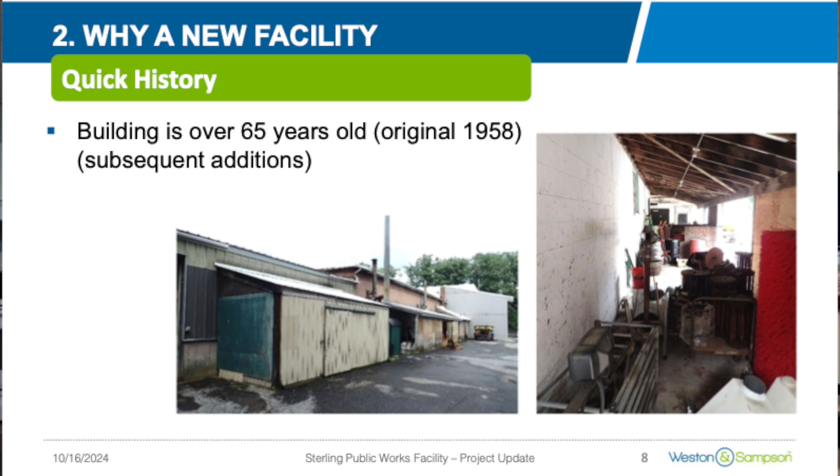So also in reference to the population, when this facility was built in 1958, around that time, the population grew pretty rapidly, and it's more than doubled since then. And with the higher population comes more road miles to maintain, more responsibilities in general, larger fleet items quantity-wise, and the size of the trucks themselves.

So all of those increases, and they've made some additions, but they're working out of a facility that's undersized. This negatively impacts their response time, general efficiencies, employee safety, and health concerns with the migrating fumes and the vehicles that are parked outside that hinders their lifespan.

So I touched on just some of those aspects. Essentially, the facility does not meet codes of today. The building code does not. It is not compliant with building code, the accessibility codes, OSHA. Those operational efficiencies are hindered for today and for future growth opportunities.

There's inefficiencies with energy. Again, it's unsafe and unhealthy for the staff that works out of this facility, and there are structural deficiencies. Here are a couple examples. So some of the foundation is cracking. There's CMU breaks, like a step crack above some of the penetrations. There's water damage. I believe there's some examples of some leaks throughout the facility.

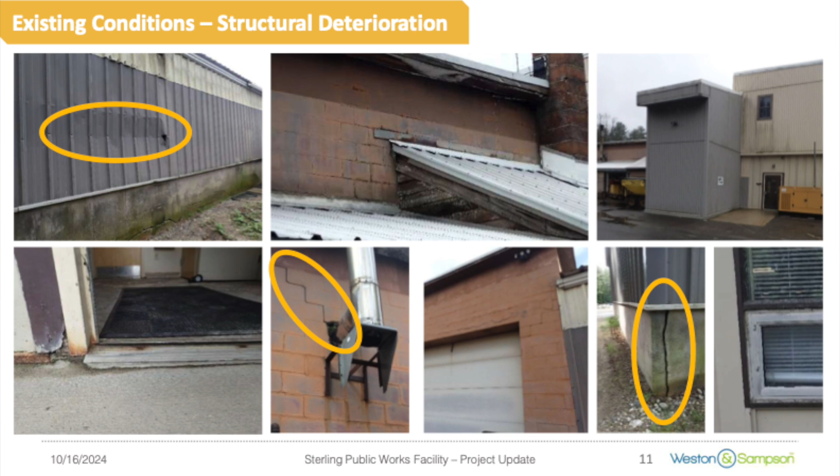These next few slides show a side-by-side comparison of what they're working with today and what a more standard modern facility could provide. So office space is cluttered. There's not really adequate daylighting. In a newer facility, you would get the adequate furniture systems and proper daylighting.

Same deal, this room we're in right now is the break room, but it's also doubling as these conference spaces. In a new facility, you could separate those, so you could have a conference meeting while the staff is using a separate break room. In terms of IT and data, this is pretty, the photos speak for themselves, I think. They're doing the best they can, but it is pretty clustered and a bit archaic compared to a new setup with a data rack.

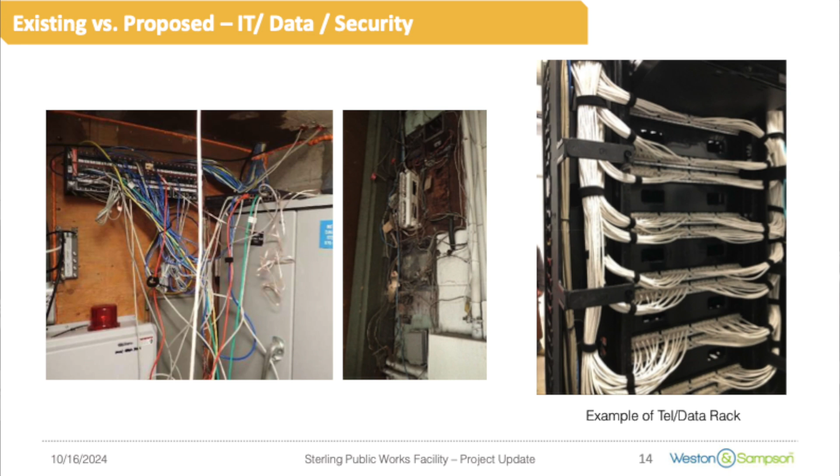In terms of the SCADA, this is a risk, a security risk, and as a first responder, that could be a problem if things went down.

Fleet maintenance. On the left, we can see low ceilings, pretty narrow bays, so that limits the mechanics from moving around the equipment they're maintaining with ease. There's clogged floor drains that are no longer working compared to a modern facility, which would have a dedicated fluid storage room with containment curbs.

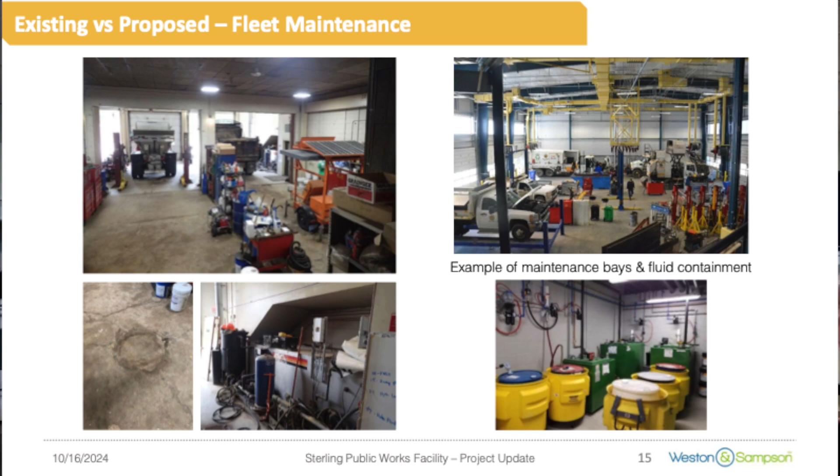So if there's spills, it's contained. It's not at risk of leaking outside the building. There are high overhead doors. The structure and all the utilities are high above, so there's no risk of when you raise a truck potentially hitting the structure or clipping into the fire protection system.

Fleet storage, again, a lot of these trucks and plows and equipment are being stored outside in storage containers, but also just outside exposed to the weather, which you can see some areas of rust. The vehicles, they can get inside, they're very tightly packed here. There's really no clearance for staff to walk around the truck safely.

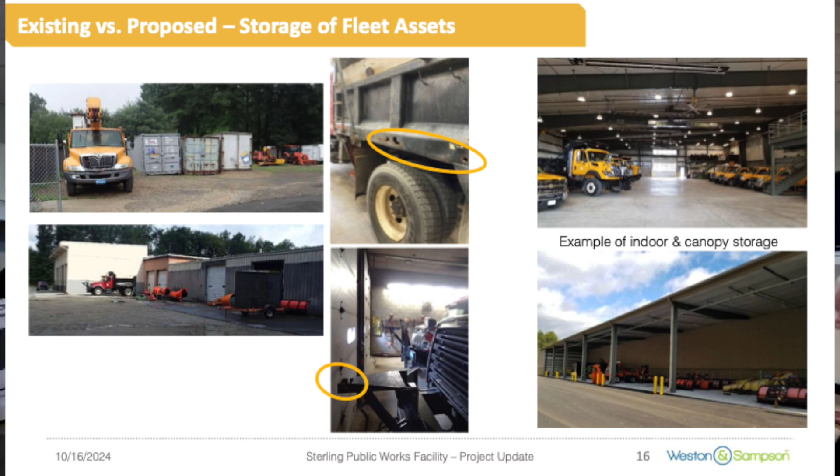Compared to a center drive aisle storage arrangement where you could have your angled stacked parking for quick in and out as a first responder, you can really cut down on unproductive labor. If things are stored outside, the staff first has to clear it off, start up engines. That will take much longer than if it's in a minimally conditioned garage.

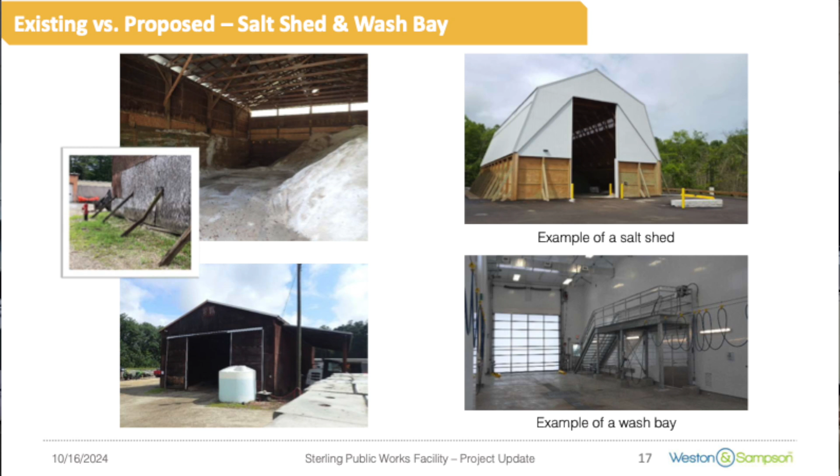In terms of salt shed and wash bay, the salt shed currently has serious concern of potentially failing structurally. There's been some efforts to reinforce the walls, but even those braces are cracking. There is no wash bay currently. In a modern facility, typically the Public Works includes essentially a car wash to knock off any of the salt buildup that can corrode the vehicle faster. So it helps to really maintain the trucks and get the full lifespan out of these very expensive equipment pieces.

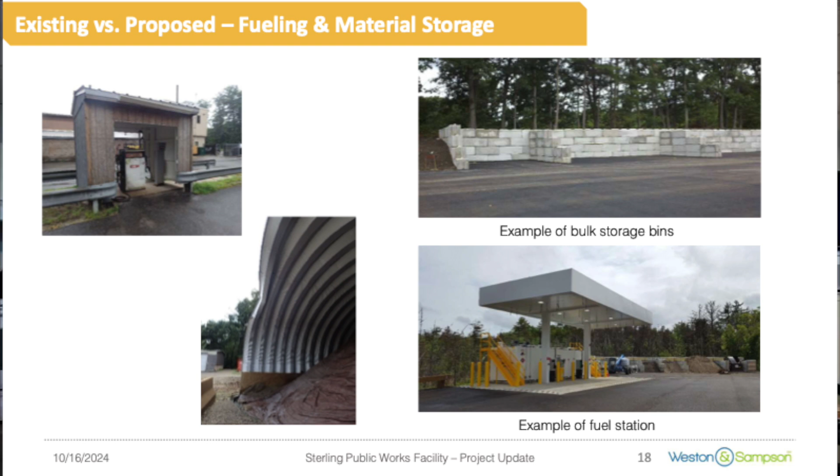And then fueling, the image on the right shows what a modern fuel station would look like with above ground tanks and some bulk storage bins, using blocks to keep the material within the block and not spill out onto the site, so you can really maximize your supply.

So expanding on these opportunities and benefits with a new facility. Number one, safe and healthy. We design fume mitigation walls so the exhaust won't migrate into the administrative spaces. There's an increased lifespan that comes with storing vehicles inside, which reduces maintenance and replacement needs. The building would comply with codes and regulations and overall improve operational efficiencies in response time.

There could be large exterior spaces throughout the site for other town use. Different departments, other agencies in town could potentially use some of the exterior space to store their overflow material. In terms of employee morale, it could help attract staff, retain staff, and all in all, meet the demands of today, but also for the next 75 years.

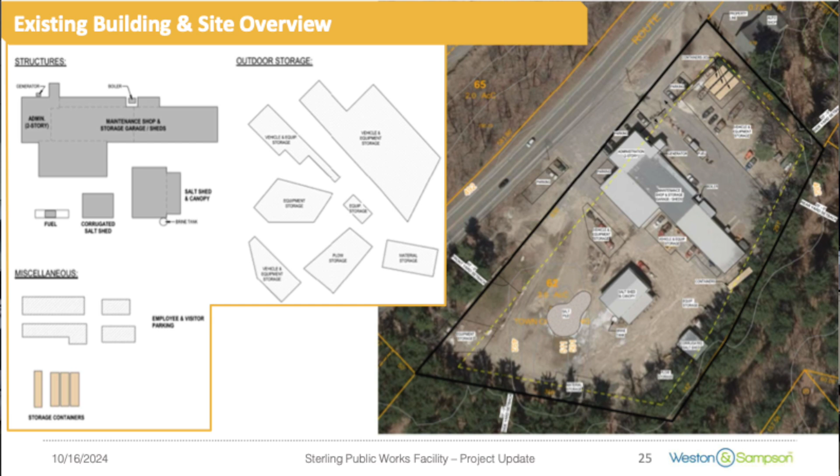Here's a quick overview of this site. Currently, the building itself is about 16,000 square feet. But there's a bunch of areas throughout the site storing overflow equipment outside, so that needs to be taken into consideration when comparing our proposed program of about 36,800 square feet. Again, this building is 16,000, but keep in mind that's 24,000 square feet of storage areas without coverage. So I think the numbers are justified.

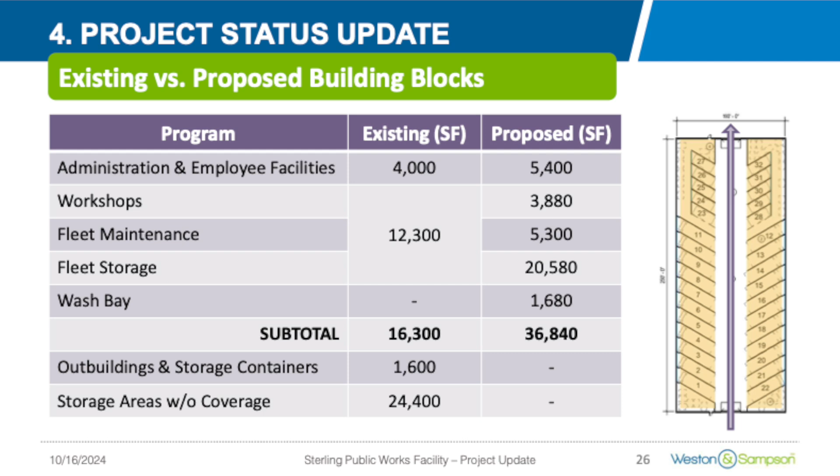The largest space of that is the fleet storage garage. Luckily, that's the cheapest per square foot to construct, and it's critical for quick response, keeping the center drive aisle free and having two stacked rows of vehicles at an angle. Other than that, we have our admin and employee facilities, the workshops, fleet maintenance, and a wash bay. So taking those building blocks...

We did a few conceptual site layouts using this site. There were a few good options here, but it really is maxing out the size of the parcel. It's pretty small to begin with, and when you consider setbacks, we are getting very tight against the property line.

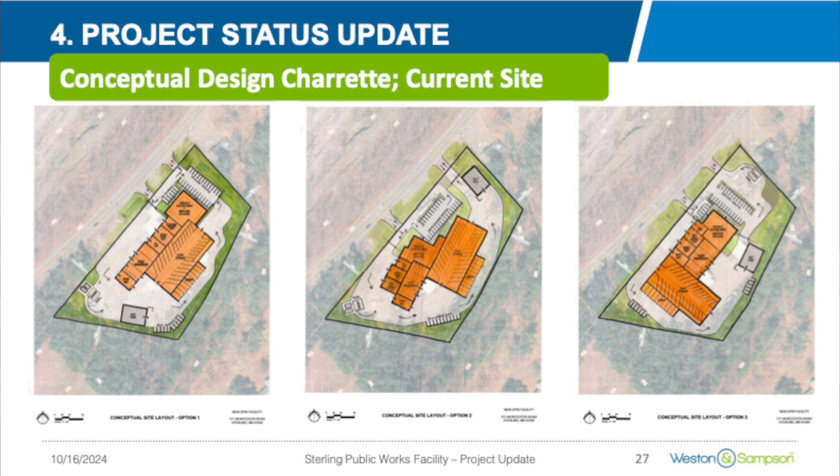So during that process, another site came up, the landfill site, or the sand pit behind the landfill site. We looked at a few site plan concepts there using those same building blocks, but I'd like to call out that this incorporates a drop-off loop for residential yard waste, which adds another community amenity.

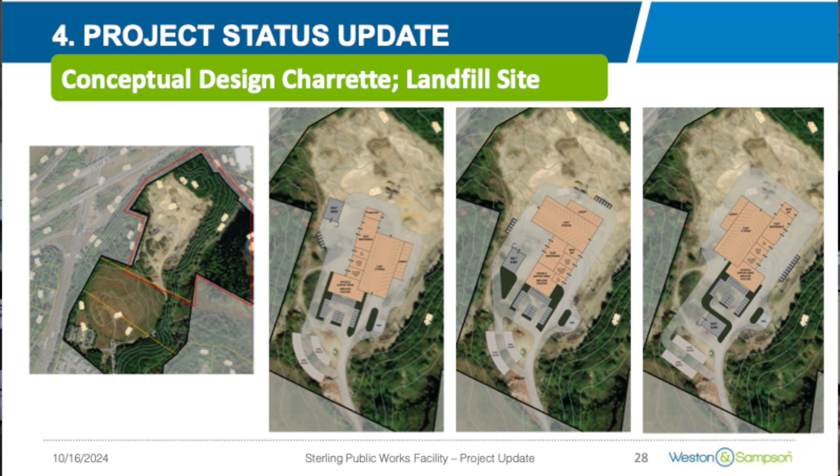Thank you, Della. Sorry, I've been sitting all day, so I'm going to take this opportunity to stand.

So Della talked about the program and the size that we came up with. This is a once in a career, once in a lifetime opportunity for the town to develop a public works facility, and that number that was just given, what was it, 36,000 square feet

is hard to understand for your residents, and probably you in this room and a lot of other people. So what we try to do is give you a comparison. Other communities, what have they done?

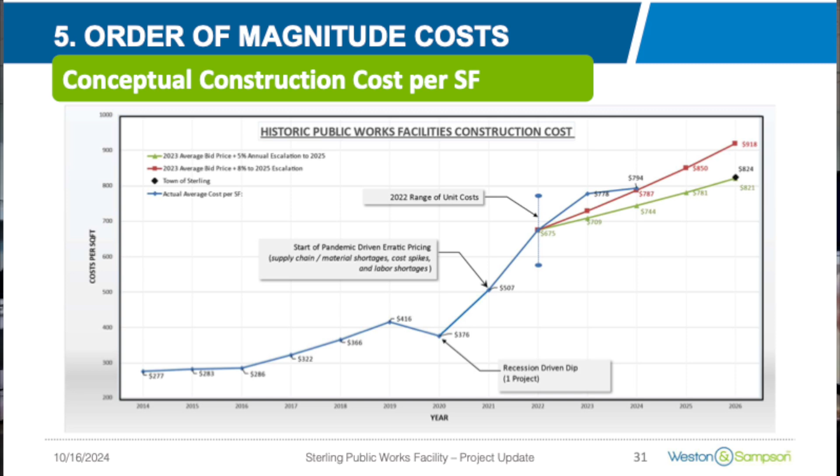Contractors were flush with work. There were labor shortages, material shortages, everything driving up the price for a lot of people. Pre-engineered metal buildings at that time had a lead time of about 16 months, and companies weren't guaranteeing their pricing until like 3 weeks prior to delivery. How does a contractor hold his price on something like that? That uncertainty drives up the price.

Fortunately, we're out of that situation now, but the trend continued for a couple of years. You can see in 2022 that range of pricing we've got, and that's a pretty big range. That vertical line represents the highest bid and the lowest bid we received, all in cost per square foot.

2024, we have some good information, but it's still kind of erratic. We're opening another bid in about a month, so hopefully that will get us some good data. Because we don't feel very confident with the 2024 information yet, and 2023 was only one project bid, we went back to 2022 and escalated out at 5%, that's the green line, and also at 8%, that's the red line. That's the trend we see for a lot of these facilities. You can see that black diamond, 2026, which is what we'd expect Sterling to come in around.